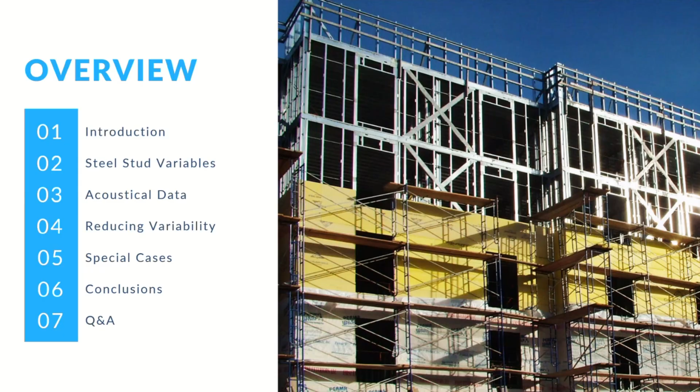Feel free again to throw questions in as we go. Dave will answer the easy ones, but if it's acoustics, it will probably wait till the end and I'll take it from there. Or construction—if you guys have construction questions or fire questions, Mike Gernhardt is on. He's my boss, he runs PAC International, and he's the construction and fire guru. There he is, waving his hand. He knows so much about fire, acoustics, and construction, so feel free to throw in any of those sorts of questions as we go.

So, taking a step back—why does all this matter? Why do we need to talk about these things? Well, acoustical recommendations actually need to be constructible. It's kind of an issue in the field.

I tell this story quite a bit, so you may have heard it before if you've tuned into some of the old webinars I've done. But I used to be an acoustical consultant, and as a consultant I had to oversee the acoustics side of projects. I remember there was this specific job where I had a door that needed—the project requirements were an acoustic rating of STC 45, and then it had a ballistic requirement as well. I think it was UL 752 level 8.

That could be wrong, so someone could fact check me, but that's the number that comes to my head, and it was definitely level 8.

So I had to balance these two project constraints, and I was the acoustics person. I knew acoustic door ratings, I had a catalog of doors I could pull from and say these are my acoustic doors, but I had no clue about ballistic rating. So I had to study up, freshen up on my ballistic requirements, and learn a bit, and ultimately recommend a door that would meet all the project requirements.

That was kind of my philosophy there. I would take the same job and recommend certain things about steel stud construction on other jobs, not just this one, like construction, stud spacing, gauge, and all these things, making recommendations really just focusing on the acoustics and not knowing what the other project limitations were. So a lot of times the recommendations I ended up making weren't actually constructible due to other constraints I was just kind of ignorant towards.

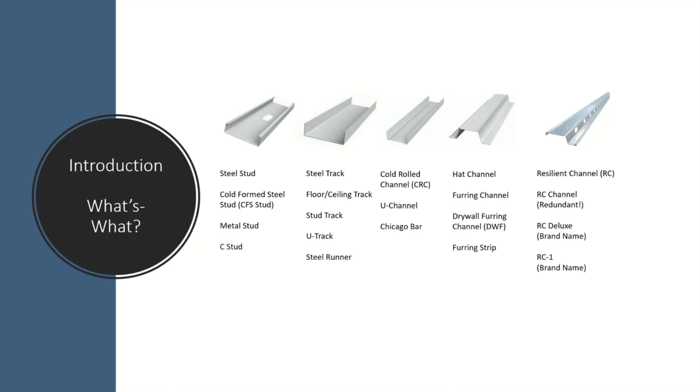One thing I will point out is resilient channel comes up often, and resilient channel is called RC. You'll also often see it called RC channel, which is a little bit of that ATM machine redundancy. And then RC Deluxe and RC1 are both brand names—so that's Kleenex versus tissue, that sort of a thing. So if you see that on plans, just know some people often end up with brand names on plans, and that doesn't always get accurately reflected in the specifications and stuff like that.

So we're going to really hone in here on the steel studs—just kind of an overview, anatomy of steel studs and the different parts. There's the web, which is kind of that depth of your steel stud.

So when we're talking about the air cavity space, that's really dependent on your web. The flange is that face of the steel stud, what you actually screw stuff into. The lip is the return on that other side, how far in it goes. And then the gauge or mil thickness—that's a big one, and we're going to spend a lot of time talking about gauge and mil thickness. That's just the actual metal thickness. So if you hear someone talk about thickness of steel studs, they're often talking about the actual material metal thickness, not the depth or web.

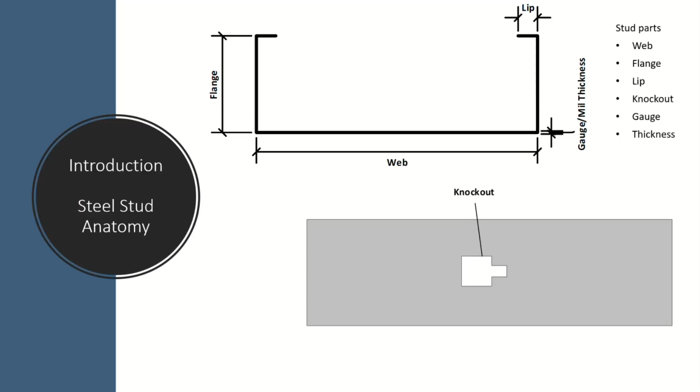The copper wire industry used to pull wires through hand-crank draw plates. In doing that, you would make the diameter of the wire smaller, so you'd have a thinner wire and it would elongate the wire. These holes were kind of conical, coming to a point, with different thickness openings. Pulling wire through these, you could decrease the thickness, and this was pretty standard. Back in the day, there was tons of variability in this process.

You have variability in the manufacturer of the draw plate. You have consistency of your metal - how refined was the copper you're pulling through. Draw plates wear out over time, so your gauges kind of increase based on which ones you're using a lot.

Gauge generally meant thickness, but it was really referencing this process - so when you hear gauge, that's kind of where it came from. But an important thing to note is this process looked very different for different types of metal and applications. Thinning a copper wire is very different from thinning a steel stud, and different metals have different malleabilities. So if you look at gauge thickness, there's not like gauge X equals this thick as a blanket statement across metal types. The copper table looks very different from the steel stud table versus aluminum or tin or brass or whatever else. It's all very, very variable.

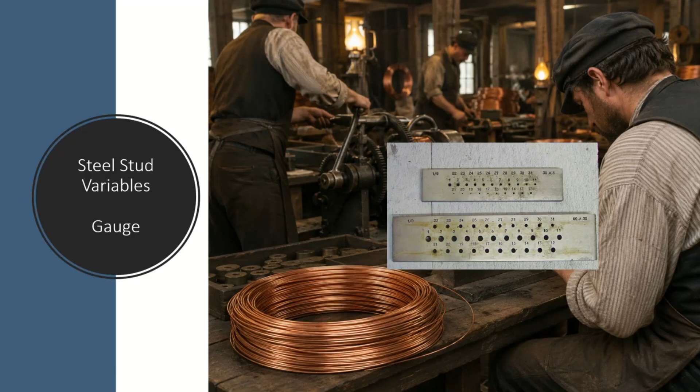And there's some tolerance allowed within gauging of a wire, or a steel stud in this case. So it's just kind of nuanced - it's kind of tricky. Another thing you'll often see is drywall versus structural gauge.

Where gauge grew to mean this process of thinning out your metal, eventually it became more about the application you want to put your stud in. If you have a drywall stud, meaning non-load bearing, it only has to hold up its own weight. Whereas a structural wall has to hold up some allotted portion of the building - it's load bearing. So to successfully span the height it needs to span, you can use a thinner stud if you're not holding up any weight of the building. If you have a structural stud, it needs to be a little thicker, and they're both called 20 gauge in certain circumstances. So it took another step from meaning the process to meaning the application of what you're actually building.

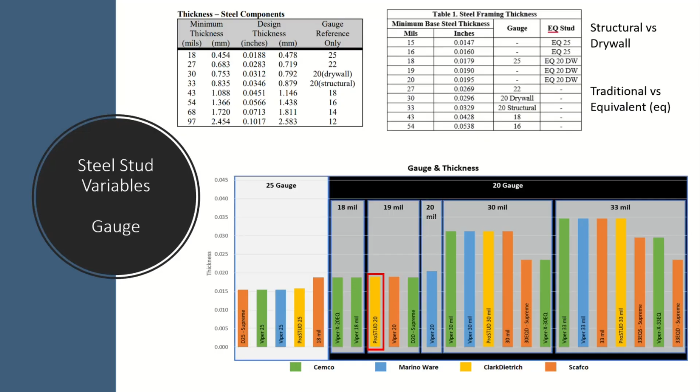But why does it matter for acoustics? Well, gauge, or the thickness of the stud, really affects the acoustical performance. So just a rule of thumb in the industry is the thinner the gauge, the less stiff your wall is, the less acoustic energy gets transmitted through, and the better your acoustical rating is.

We did a sampling of tests here and found that to generally be true. There are some exceptions, and some of that has to do with lab variability and certain things like that. But generally the trend, especially if you conglomerate a lot of other data that's out there online, you'll find that trend to generally be true.

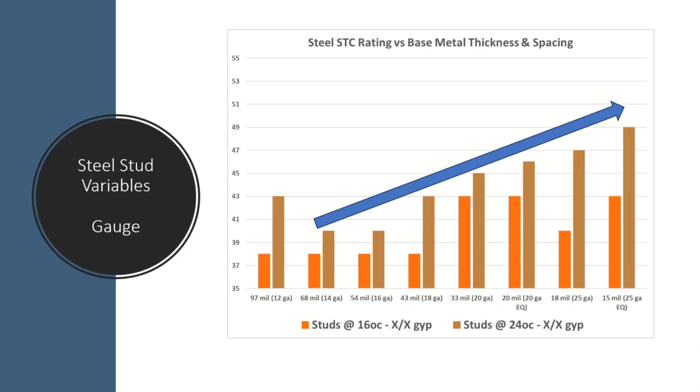So let's walk through an interesting example here. Again, I have to shout out Ben Schaefer at PABCO. He did a lot of this testing and has given us his blessing and permission to present it. In the past, Ben Schaefer and Mike Rayleigh have presented it together, so huge shout out to him, can't thank him enough.

But we tested many studs. If we start by looking at our steel stud walls, our single layer of type X gypsum board directly attached to both sides of the wall, we can look at the spread. Our best, as we could have maybe predicted, acoustical performance was the 15 mil, that's the thinnest steel stud. And the worst one was the 54 mil. So even though there's thicker studs to the left of that on this graph, this one happened to perform the worst.

And there's always just a little bit of nuance and variability with acoustical testing, but that's a 9-point difference. So stud gauge clearly made a huge difference. 9 points is significant.

If you repeat that examination, now we're adding the resilient channel. This is RC Deluxe, which is Clark Dietrich resilient channel, kind of known to be the best acoustical performing resilient channel. So that's the RC used here. You are now detaching one layer of gypsum board from one side of the studs, and looking at the spread, it actually shrinks to 5 points.

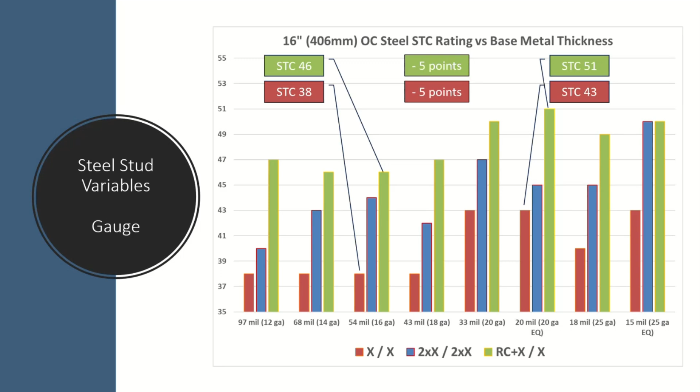So yeah, just kind of an interesting comparison here. We'll get more into the stud spacing variables in a bit. But another thing to note is that changing from 24-inch to 16-inch, all these bars drop together. That's kind of what acousticians know, or lots of them know all of this.

And so the hopeful acoustician might say, let's put these 18 mil thin steel studs everywhere. I've been guilty of this when I was an acoustician. I was like, great, thin gauge is good for acoustics, let's take advantage of that.

That's actually a cost decrease for a project. So I'm going to be the hero and say, hey, we can use these thin studs that are cheaper and better for acoustics. It feels nice to be the hero because often the acoustician is increasing costs with fiberglass panels, high NRC ceiling tiles, and all the other things acousticians love to specify.

So the hopeful acoustician's like, great, let's take advantage of these studs. Let's space them at 24 inches on center. Let's put 18, 15 mil everywhere. And often you'll find that that is not actually as effective as you would hope. And it's not because the steel studs aren't effective. It's because you actually can't put them in a lot of places.

So this is, again, the SSMA table. This is a wall limiting height table. And if you read note 4 here, this is the composite limiting height, which is just referencing a steel stud with a single layer of gypsum on both sides, installed in the vertical orientation. And if you run through this example, 5 pounds per square foot, L over 240, 3 5/8 web - that's the depth of your stud - and 18 mil, 24 inches on center, you get a limiting height of 13 foot 2.

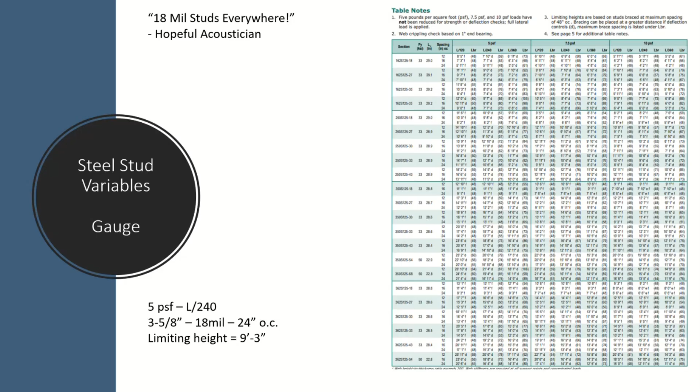But if you detach one layer of gypsum board, which we often do for acoustics by adding resilient channel or clips or other things for similar reasons, now you have one side that is not as braced as the other side. So they have another table in the SSMA for braced at 48 inches on center, and your limiting height in that same example drops to 9 foot 3.

So not very tall. I think a lot of schools require a minimum of 9 foot, so you're kind of just passing that. But also, if you're hanging or detaching one side of your gypsum board, then often you're not allowed to hang things from that side. And schools have lockers often on one side or wall-mounted TVs on the hall side, and then on the other side they have cabinets or whiteboards or chalkboards, and lots of wall-hung things in schools.

So you're barely passing that requirement. An architect would probably rather be closer to the 11, 12, 13 foot range. But you're also adding in this other limitation of not being able to attach things to the wall. So you barely pass a height requirement for schools. Again, other places that requirement might not be applicable - they wouldn't allow a 9 foot wall regardless - and you're kind of adding other project limitations in.

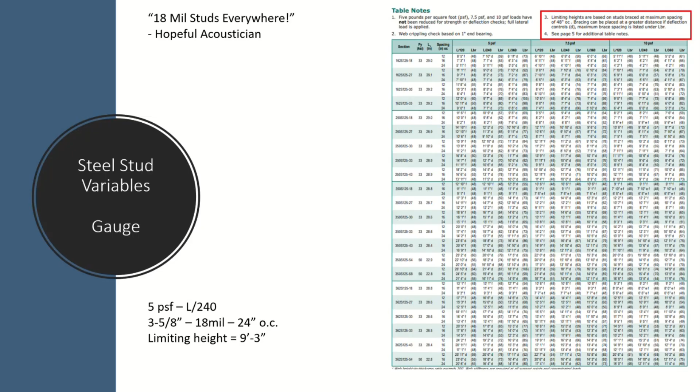So those are the sorts of things that, definitely when I was an acoustician, I was less aware of, and I was like, yeah, let's use these thin studs. And it turns out it's really tricky to even get a thin steel stud to work. And just to drive the point home, here's another example of a limitation: if you have load-bearing steel studs and you have multiple floors in your building, the studs at the bottom are holding a lot more weight than the studs at the top.

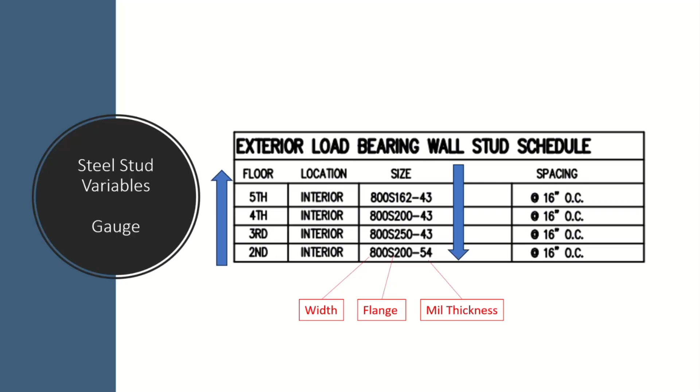So as your floors go up, your size goes down. Those arrows might be a little confusing, but the thickness of your studs can go down as you get to higher and higher floors. So if you, as an acoustician, put one wall type together and recommend it, you have other things in the project controlling what size studs can go where.

So again, a snip from the SSMA. Here's how to read that string of numbers and letters we just saw on the other slide. Feel free to look at that for a bit if you want. The important one I want to talk about is that last number referencing the mil thickness. An important note is that it's specified as a minimum thickness, so you can use thicker studs and still meet the requirements of this stud specification.

And that's also true in fire designs. Here's a snip from a random UL design. If you look at the steel studs, it says minimum 25 MSG, that's the gauge, steel studs spaced at a maximum of 24 inches on center. So stud thicknesses are specified as minimums, but stud spacing is specified as maximums, and that's true both for structural and for fire.

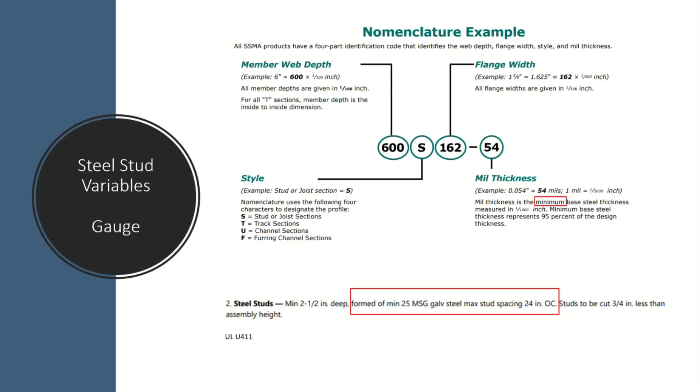So even if you're an acoustician pushing for a thin, light gauge steel stud on a project, if you can even get it, there are other limitations that often mean you can't. And even if you can, it's still specified as a minimum. A builder could just make things easy for themselves and build everything a little thicker. That happens - I've heard of it and seen it on projects. They don't have to talk to the acoustician. You don't get an RFI, you don't even get informed it's happening. They just think, oh, this thicker stud will meet all the requirements, I'll use that. And the acoustician has no clue that's happening. So that's another place you can run into trouble.

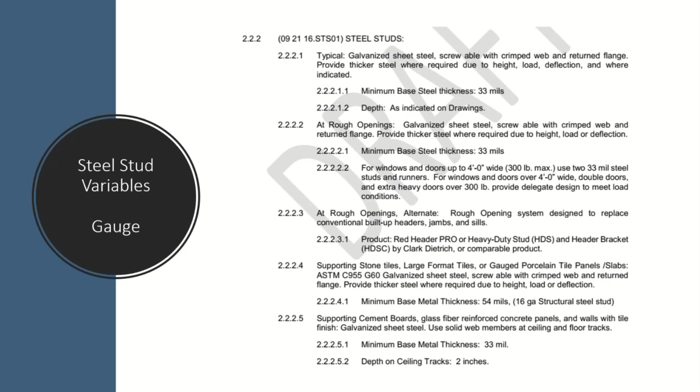So you might ask, what about my non-load bearing studs that aren't very high walls? Can I use my thin steel studs there? Here's a sample spec of steel stud - you'll see a typical steel stud uses a baseline thickness of 33 mils. So if you're an acoustician pushing for lighter studs, this is where you need to update things. And it's really hard to get them to actually update things - it's definitely taking a step away from the standards that a lot of people use.

You'll note that if you're supporting anything beyond the wall itself, the thickness increases - here it's 33 to 54 mils. That can be stuff like porcelain tiles, stones, or whatever it might be. Also, AV back boxes and control panels often require the same 54 mil studs. So think about designing a conference room where you want to put the control panel that controls the TV, the microphone, and turns on Teams - that often gets mounted into the wall, and that can require a 54 mil stud as well.

So hopefully I've driven this point home enough: light gauge steel studs are really difficult to actually get on a project. I remember when I was an acoustician recommending these things, I would mark up drawings and say, hey, can we make these thinner steel studs? Then I'd talk to the architect, and he'd say, oh, you want them thinner? I've never heard of that, because most people want thicker and thicker studs.

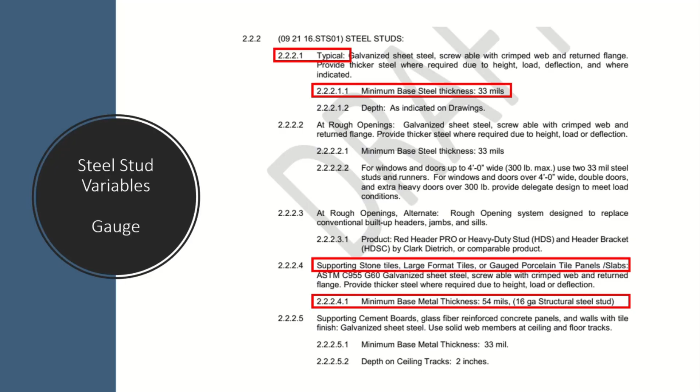So the other thing we use often as acousticians is stud spacing. The general rule is that 24 inches on center gives less area for your studs to contact your gypsum board, and overall less stiff walls, so that would be better than 16 inches on center acoustically.

To illustrate that point, the red space here is where your stud would contact your gypsum board. If you reduce to 16 inches on center, you have a lot more red space, right? So that's more area for acoustic energy to be transmitted through. Overall, more radiated energy comes out the other side of the wall.

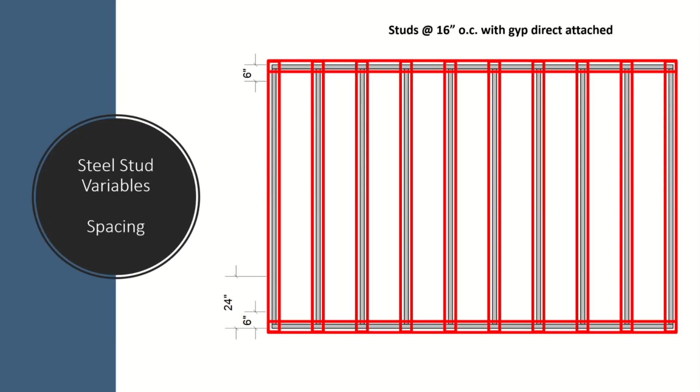Earlier we saw the stud spacing did affect the resilient channel as well, so we'll go through that same exercise here. This is a sample wall with studs at 24 inches on center, and resilient channel also at 24 inches on center. If you count all the little crosses where everything passes through each other — and everywhere the resilient channel crosses a stud, it has to get screwed in and attached.

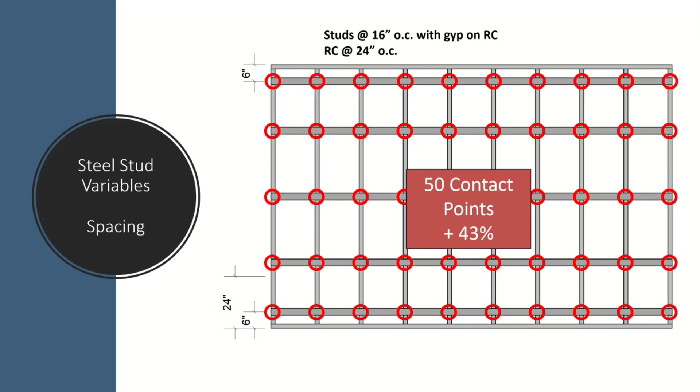So you have overall 35 contact points between your resilient channel and your studs. If you decrease your stud spacing to 16 inches on center, you increase your contact points up to 50 — that's a 43% increase in number of contact points. So more points for the acoustic energy to get transmitted, and worse overall acoustical performance.

So let's repeat that now with clips on one side. The clips can be attached at 24 by 48 in this kind of alternating grid pattern, and that's not as dependent on your stud spacing.

If we go through that same exercise, here's 24 inches on center studs, decreased to 16 inches on center studs — you actually only added one contact point, a 5% increase. So if the theory holds, it would be a lot less of a difference using the clips.

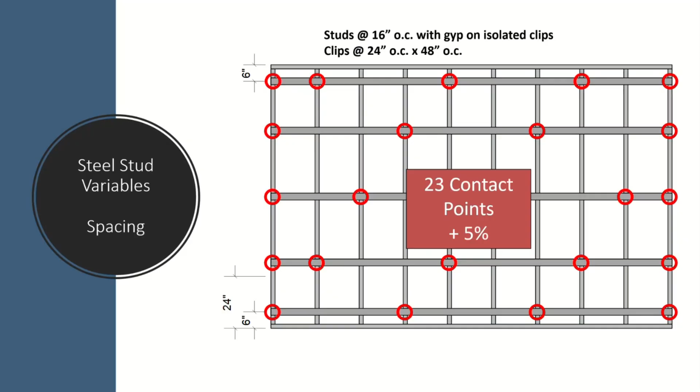Okay, so let's go beyond theory and single numbers and dive right into maybe the hardest graph to digest that I've ever seen. Here I have to shout out Ben yet again — he put this together, this is a lot of his test data, and it's a lot to look at and a lot to think about, so I'm going to walk you all through it. Don't worry, we're diving in it together.

If you look at this graph, on the bottom axis we have frequency — low frequency at the left, high frequency at the right. Then the vertical axis steps up in stud thickness, or steps down in gauge: thin gauge studs are at the top, thick structural studs are toward the bottom. The color code represents the difference in a 24-inch on center spaced wall versus a 16-inch on center spaced wall. So what we've done is tested a wall type built at 24 inches on center, then retested it built at 16 inches on center, and found the delta.

As we look at it, think of the Roy G. Biv rainbow — if you're at the Roy part, that means 24 inches on center outperformed 16 inch on center. If you're at the Biv part, that means 16 inch on center outperformed 24 inch on center. Hopefully that makes sense.

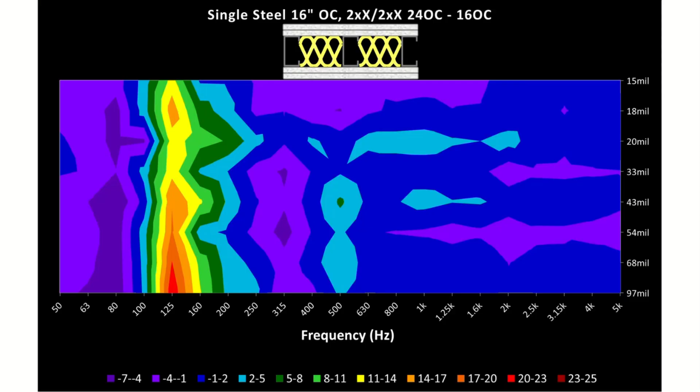So, another complicated graph, but what we're doing is basically splitting it apart. The previous graph was looking at the deltas — this graph is looking at both next to each other, so 16 inch on center at the left, 24 inches on center at the right. When it comes to that low frequency, what's actually happening is we're decreasing the resonance of the stiffness of the wall. If you're not aware, the STC curve starts at 125, and you can see, if I go back a slide, that's where a lot of the differences are.

Often a wall will get 8 dB limited at 125. So if you shift your resonance below 125 in frequency, you improve the performance at 125 by quite a bit. And if you're 8 dB limited there, you can have a significant difference in your STC rating just by changing your stud spacing. But what you're not doing is changing the actual amount of acoustic energy that's getting transmitted through this panel. Or maybe you are a little bit, but you're shifting a resonance lower, and it's just mostly being ignored by your STC rating, which is one of those problems when we want to use a single number rating for everything. We lose a lot of resolution and clarity on some of the more nuanced things that are happening.

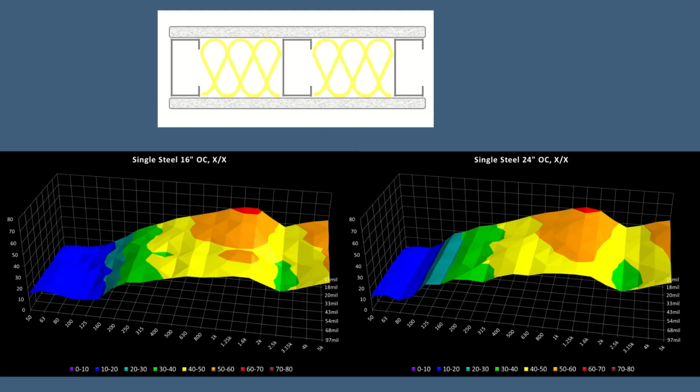So if you have a wall where you're worried about things below the speech frequencies and below STC curves, and you have some low frequency energy, and you say, let's use a 24 inch on center spaced wall because that's better for acoustics, that might not actually be the case. You might actually make your problem worse. So some of these rules of thumb can fall apart when you start looking at things a little closer.

So let's repeat that now and go back to detaching one side of gypsum board again on RC Deluxe. You'll see that a lot of those differences are consistent across this vertical axis for the most part. This is again looking at deltas, and a lot of the deltas shrunk. So what that means is your dependence on both stud spacing and mil thickness shrinks as you detach things from the wall, or detach your gypsum board from the studs.

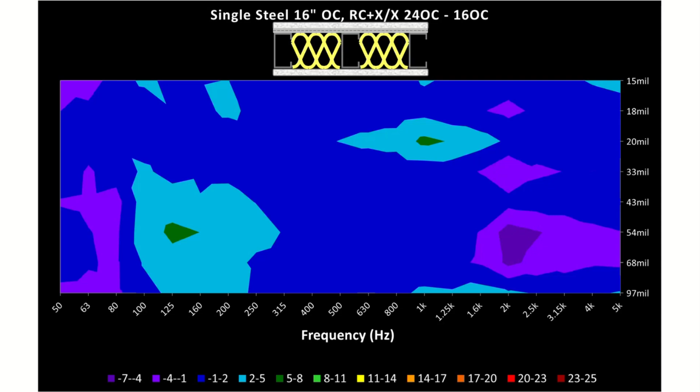So we wanted to go ahead and test two of our different isolators that do this, that detach gypsum board from the wall, decouplers, right? We have our RSIC-V on the left, which is just the metal claw part of our RSIC-1, which hopefully you all know and love and specify all the time. The RSIC-1 is just a metal claw that holds your hat channel or furring channel, whatever you want to call it, and has a rubber bushing that attaches to the metal studs. The RSIC-V just removes the Rizik, or the rubber channel, so you have some metal to metal contact, but you also have the weight of your gypsum board pushing down on this friction fit claw, which provides a little bit of spring action. So it works, I would say, surprisingly well.

We're going to go through a bunch of data. We tested these two isolators on 33 mil and 54 mil studs, just to get a good representation of the minimum of what can actually be built based on all that stuff we looked at the front end of this presentation. And then 54 mil is more of the structural, increased stiffness studs.

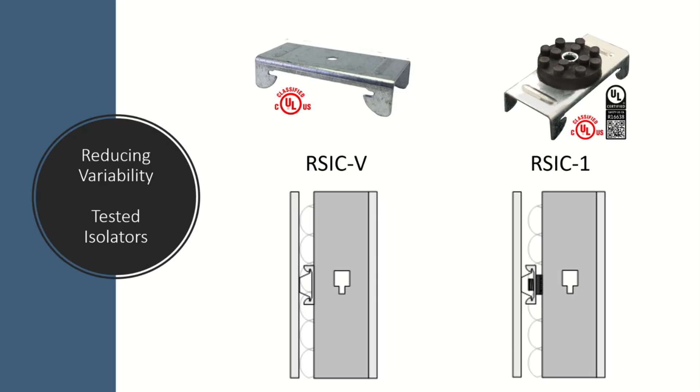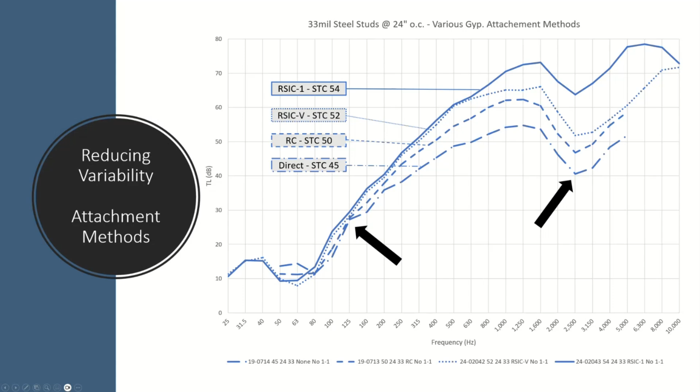Okay, so 33 mil steel studs at 24 inches on center. We can see comparing these different attachment methods from bottom to top: we go from direct attached, above that RC Deluxe, above that the RSIC-V, and above that the RSIC-1. We see a huge difference here at the coincidence dip. Clearly adding these isolators, adding these decouplers makes a significant difference there. At the low frequency, we see relatively good agreement. If you look close, it looks like the peaks of these different curves shift about a third of an octave band from changing some stiffness resonances and stuff like that. But relatively good agreement at the bottom.

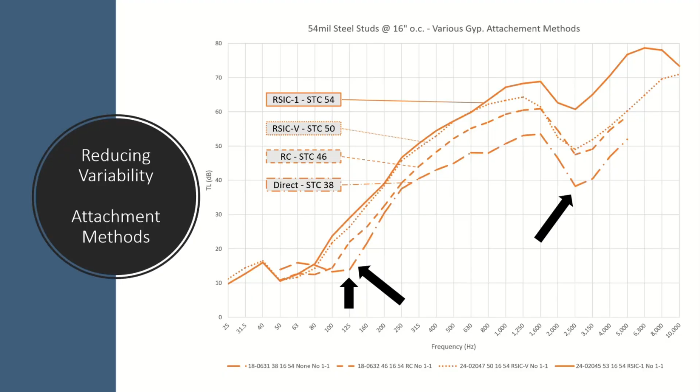And now again, moving to 16 inches on center, same dip here, same stacking, but then this spread is back. The big changes at the low frequency are back, with things converging down as you go lower and lower.

So let's flip this. We've been looking at the different attachment methods and iterating between the different gauges and spacing. Let's control for the attachment method and look at one plot with all the different spacings and stud thicknesses.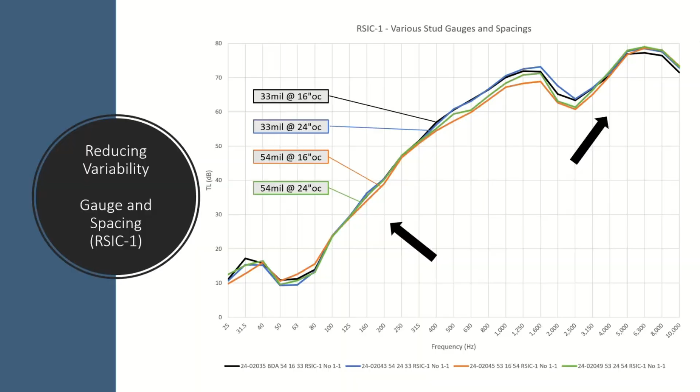So if we condense that back into these single number ratings, take single number ratings with a grain of salt. But you can see this chart, 33 mil, 54 mil, 16 inch on center, 24 inch on center, it's all within a point, which is pretty much negligible. It's definitely not noticeable to the human ear, this one point difference. So decoupling tends to reduce your reliance on both stud spacing and stud gauge.

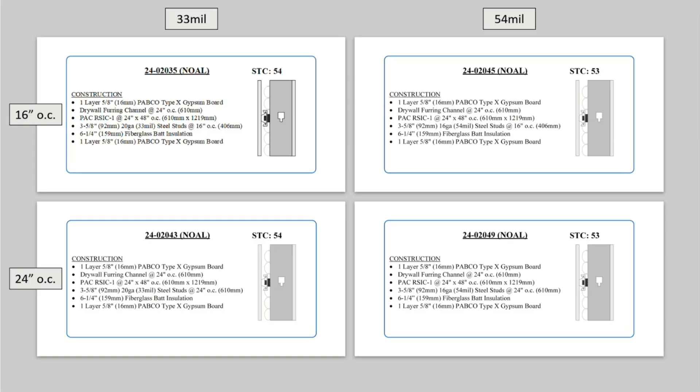So special cases, let's talk about double studs. Double studs come up quite a bit. They tend to be walls that require a high level of acoustic isolation, but because of the nature of where they're getting installed, they also tend to have very tall walls. So you have these really tall walls that need to provide a high level of acoustical isolation. If you have that, the question inevitably comes up about bracing, because if you have these tall walls, they need to be structurally sound.

If we remember back to the limiting height tables, having a layer of gypsum board on both sides of the studs was very good for structural performance. So in a double stud, by definition you don't have that on the inner layers of both of your studs. I guess you can, but that hurts your acoustical performance. So you need to brace them. And people are very concerned about tying your studs together because that's an acoustical short circuit.

Some of the other ones allowed for cross bracing, which is where you make a big X on your studs, tying your wall section corners together, which is another form of bracing, but it's all on one side. None of this is tying your two studs together. But it can and does happen. I'm not too familiar with every situation when you would, but I think it would be if it's not fire rated and there was some seismic reason to, or wind load or something like that.

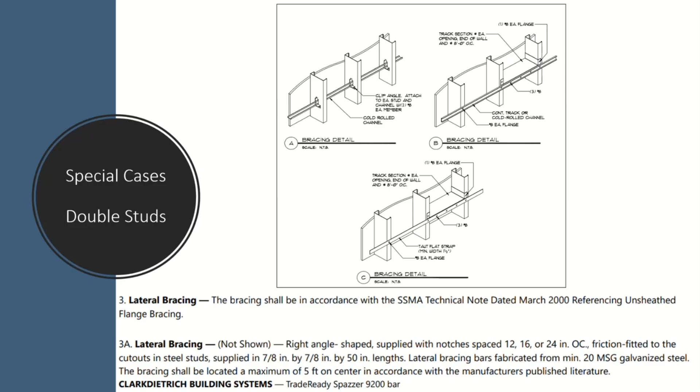So it does happen. We went ahead and tested your double stud wall, unbraced versus braced. And just like we suspected, bracing really hurts your acoustical performance. Also, I'll note this isn't only an acoustical short circuit, it's also a thermal short circuit, which I think is why the UL design doesn't typically allow for this type of bracing.

Just another thing to note: when you brace it, when you tie these two isolated tracks together, you lose a lot of your acoustical performance. But if you add the same decoupler, our RSIC-1, to one side of it, instead of having two isolated stud tracks, you have two tied together stud tracks and an isolated layer of gypsum board, or in this case 3-layer, based on the wall we were building. You're isolating the panel rather than the two stud tracks, and you gain a lot of your acoustical performance back.

You can see there's only a 3-point difference here between fully unbraced and the RSIC-1, which is pretty good. With this kind of big beefy wall, I would expect some variability to be kind of increased beyond what we normally see, so variability could be part of it, but there might still be some acoustical sacrifice.

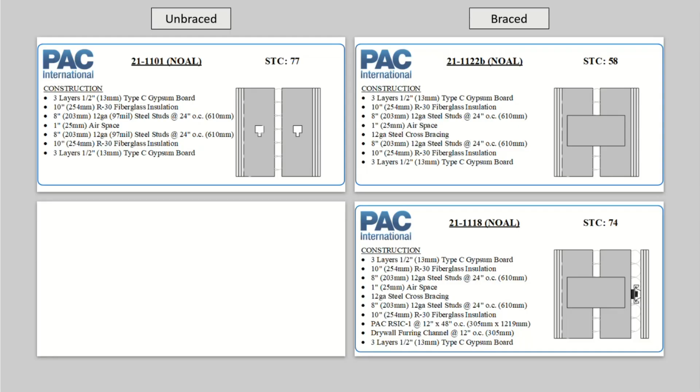That begs the question: if we can see isolating just the panel of a double stud basically provide similar, maybe equivalent, performance to isolating the two stud tracks, can we see a single stud wall perform at the level of a double stud wall, while minimizing our thickness as much as possible?

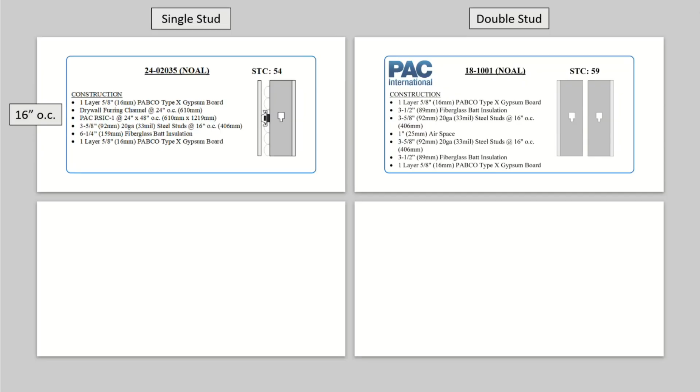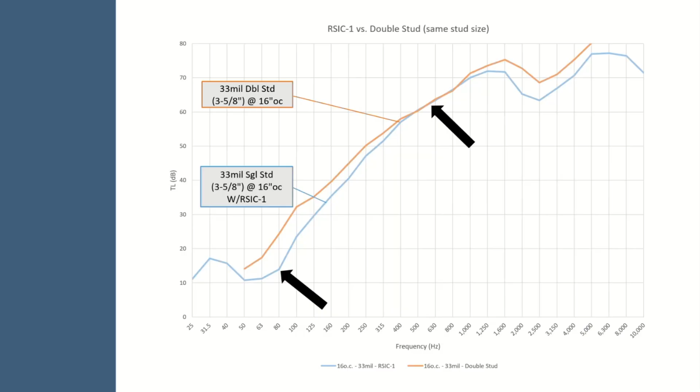As we all know, double stud walls tend to perform better than single stud walls. Here's just a comparison between the two, using the same web—that was the term from back at the beginning—the same depth of stud. If you put them on a graph, you'll see the difference you would expect. There's some agreement here at the middle, but up at the high frequency and low frequency, there's certainly some differences.

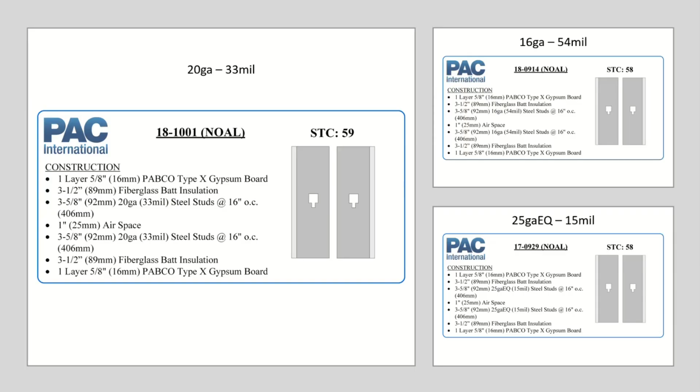If you go look at some steel stud double stud walls, changing the spacing and the gauge of the stud, you'll find that much like decoupling the gypsum board removed your reliance on stud gauge, thickness and spacing, so does using a double stud wall. Which is kind of in line with what we've been finding: if you're isolating these two things from each other and you have this big open cavity, your reliance on spacing and thickness is not as dramatic as it was. Maybe a little bit at the low frequency you still have some reliance, and there's some deltas, but for the most part we find that's pretty true.

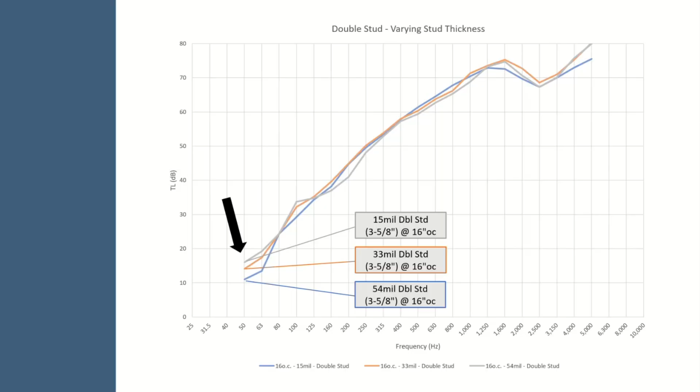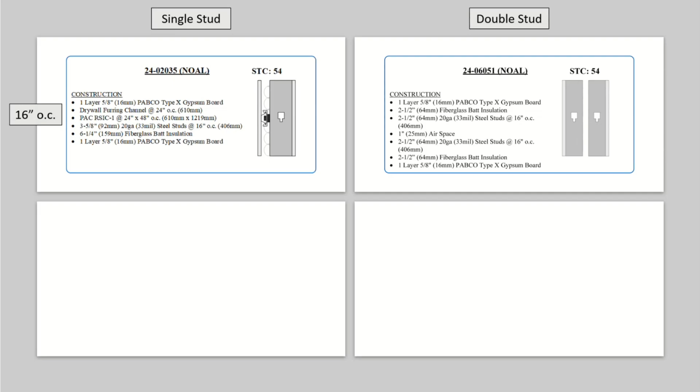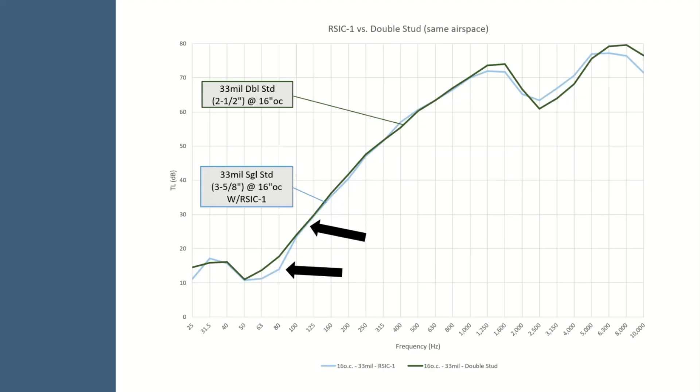So instead, let's control the total airspace. We saw a 5-point difference previously comparing the same depth studs of a single track versus a double track. If you control the airspace and let the double stud wall have thinner steel studs, you find there's actually a lot of agreement between isolating just that layer of gypsum board versus isolating both stud tracks. And of course, with acoustics, everything's got a little asterisk—if you jump into the third octave band data, you'll find some differences, but for the most part it's pretty well in line.

I think I'm running low on time, so I got to my conclusion slide. My big takeaway from all of this is: what would I do different as an acoustical consultant if I was consulting again today? I think I would not be specifying stud gauge and stud spacing nearly as much. I've talked to other acousticians who have made 33 mil just kind of their generic wall type for all of their steel stud wall recommendations, knowing you're not going to get anything much thinner than that through a design. So using other methods, especially decoupling, can reduce your reliance on those two properties of your studs and your steel stud construction walls.

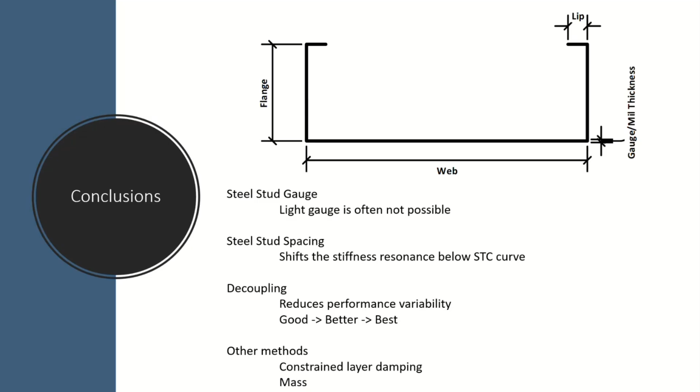In decoupling, there's still a good, better, best—we kind of saw that with the RC Deluxe to RSIC-V to RSIC-1. But there are other layers of improving acoustics that have their own pros and cons. Constrained layer damping—I have to shout out Ben Schaefer at PABCO one more time, couldn't have done this without all of the data he has so generously let us present and tested with us back before I was here. And also, always, you can add more and more mass and improve your acoustics.

Okay, well, that kind of brings us to questions.

Dave, have you been watching the Q&A? Do we have a list?

Hey, Drake, hey everyone, this is Mike from PAC here. I wanted to step in and add a few notes that I don't even know if Drake was aware of.

One of the things, Ben did great work. He did this huge series of tests. We were able to piggyback on the back and add the PAC stuff to that. So again, thanks a lot to PAC, Ben, and PABCO over there.

A couple test notes, and there's some people here I want to ask this question to. The reason we tested, and it's the Dietrich group, Jose and a couple other people here, I'd like to get some clarity on why we tested with RC Deluxe. We tested with RC Deluxe because to our knowledge, it's the only resilient channel that actually has a true steel spec for it. It's a very specific type of steel, whereas all the other RC channels, for lack of a better description, use generic 25 gauge or stiffer steel.

And the reason we use RC Deluxe, again, is because it is the most tested. It's been around, it's been out since the 60s, the design of it. So we can turn the mics on here. If the guys from Dietrich want to step in there and either validate or change that part of the conversation, I'd love to hear your input on that. If you want to put your hand up, I can turn your mics on.

The other thing, I'll just run through these and then we can get back to the RC Deluxe. On those higher performing steel stud walls that you saw, those were cross braced because they were planned to be over 30 feet tall. That's why they had so many layers of gypsum board on them. We saw the steel studs were 8-inch steel studs at, I think, 14 gauge, or an equivalent to that. Or I'm sorry, 12 gauge. So very stiff, tall walls, and we had to use that size steel to get to that 30-foot height, which is kind of where this conversation started of, how does mil thickness actually affect these wall performances?

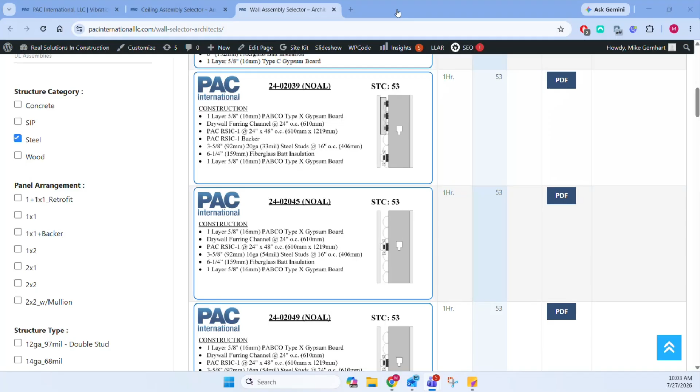And we found that it is not a significant compromise acoustically to your RSIC-1 wall, and then you can mount to that. So it would be not unlike adding blocking to know where you're going to mount things, and a little bit of planning has to go into that too. That backer can hold anything from cabinets, headboards, floating nightstands in hotels, handicap grab bars, railings, and anything that's going to have either momentary or constant load on it.

We also make a resilient channel backer. Same concept, but for a resilient channel wall. It's just kind of isolated blocking that you can mount to. So if you run into that issue on either a RSIC-1 wall or an RC wall, we do have some solutions there.

All right, thank you for that. We have one more question from Jacob Davis, and he ended the message by saying, I may have misunderstood what you're discussing, but what are some theories on how reducing OC can result in a smaller increase in performance in some walls?

Okay, so reducing the spacing of your studs, overall you're shifting your stiffness resonance of your wall lower. And the big thing is that your STC rating stops at the low end at 125 hertz. Another rule within the STC rating calculation is what's known as the 8 dB rule.

So if you're comparing your actual transmission loss performance to these pre-agreed upon curves of STC ratings, and you find the difference. If you have a curve that looks like this, and you have a performance that goes up and down, one of our rules is no single 1/3 octave band can be more than 8 dB different than that reference curve. So kind of in the weeds.